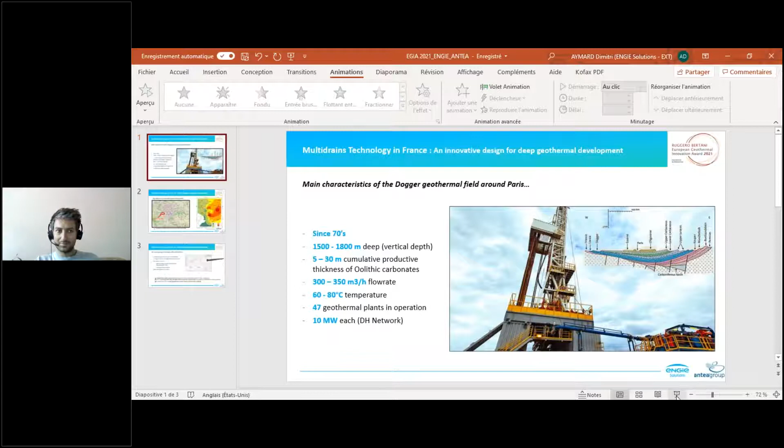Hey everyone, so Consuelo, can you give me control to present the slides? Great, I hope you can see my screen now.

So it's our pleasure to be here today. I'm Dimitri Aymard, representing ENGIE Solutions, and I will talk about our innovation that we worked on last year with Nicolas Fréchin, representing Antea. We are talking about the multi-drains technology in France, an innovative design for deep geothermal development.

Going back to the beginning, we are in the Paris Basin. On the right, we have a cross section showing this basin with different geological layers interesting for geothermal. The light blue one is the Dogger Reservoir, a geothermal field well known in Paris, used since the 1970s. Its main properties: around 1,600 meters depth, with high flow rates between 300 and 350 cubic meters per hour, and temperatures ranging between 60 and 80 degrees. In this basin we have nearly 50 geothermal plants in operation, each producing nearly 10 megawatts, used for district heating.

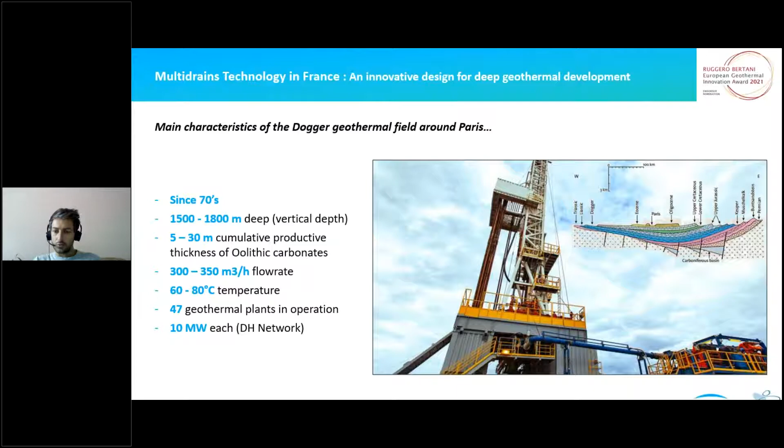One thing to understand with this reservoir is the heterogeneity of its properties. Looking at the transmissivity map on the right, different colors highlight different transmissivity values. You can see that the east side of Paris has better properties than the west side of Paris. It's the same for temperature as well.

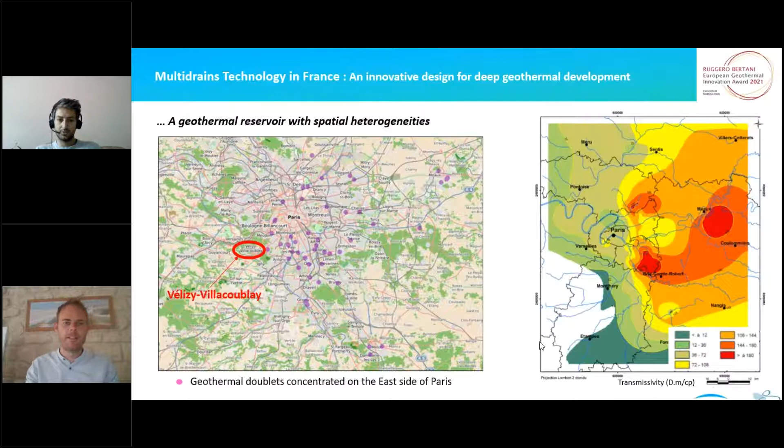I will now let Nicolas present our innovation in detail in the next slide. Good morning. So how did we go about increasing the productivity of the wells in such a geological context, as Dimitri presented?

So what is the result of this original architecture? To give you an idea, we tested the well after drilling only 1 leg in the reservoir, then tested it again after completing the full drilling and acidizing program. We found that the productivity index was multiplied by 5.5 between the 2 test phases. Hence, this technology opens up new perspectives around Paris, but also more generally wherever the targeted geothermal reservoir offers poor properties.

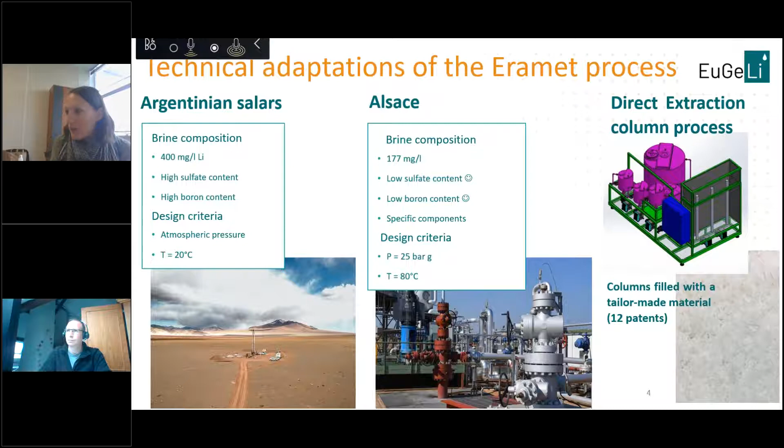This material is filled in columns to process this extraction in continuous mode. Why we applied to this geothermal award today with Électricité de Strasbourg is because we did a first pilot campaign, lasting 3 months between December 2020 and February 2021. We extracted lithium under CO2 pressure at high temperature, with no modification of the brine.

We achieved a very high yield, up to 90% lithium recovery. This is why we are very proud to apply to this innovation award today.

To our knowledge, this is a first in this domain. Lithium can be easily extracted at atmospheric pressure, but under pressure, using this type of technology, this is a first. And this is a first step for us, because we are right now preparing the second pilot campaign of the EuGeLi project in order to have what we call the industrially scalable pilot test. So we will have all the engineering data to be able to design and plan the performance of the future lithium geothermal plant. Thank you for your attention.

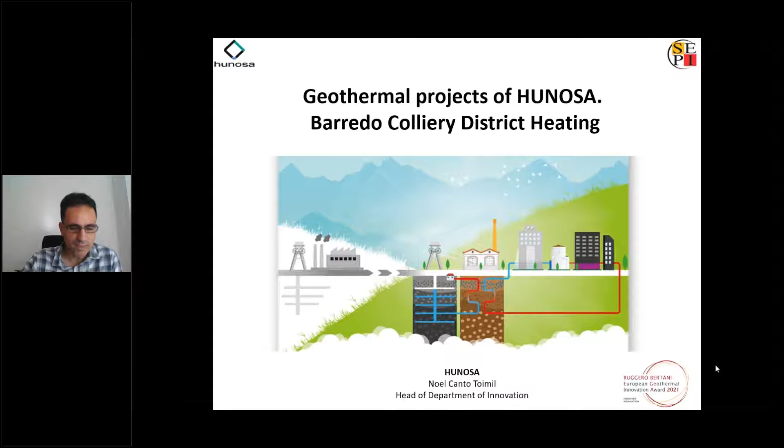Good morning, everybody. My speech addresses the geothermal project Barredo Colliery district heating, one of the geothermal projects that we have developed using mine water, and the one that has been nominated for this award. Before going into detail, I would like to give you a brief outline of our company. HUNOSA is a coal mining company located in Asturias, in the north of Spain.

From the beginning, HUNOSA has been focused on coal extraction as well as electricity production. Nowadays, after a long process of reduction in the number of mines and employment, HUNOSA is trying to diversify into different things, such as renewable energy, especially geothermal projects using mine water.

We started with geothermal projects because we wanted to look for a use for those mines that were not in operation and were flooded. When a mine is closed and flooded, we still need to pump water to keep the water table from damaging buildings or infrastructure, which creates everlasting costs for us. Geothermal projects are a source of income that helps offset pumping expenses. At the same time, we harness a resource, the mine water, that was previously considered a waste product. We also provide new life for mining facilities, collaborate to develop renewable energies, and create new jobs.

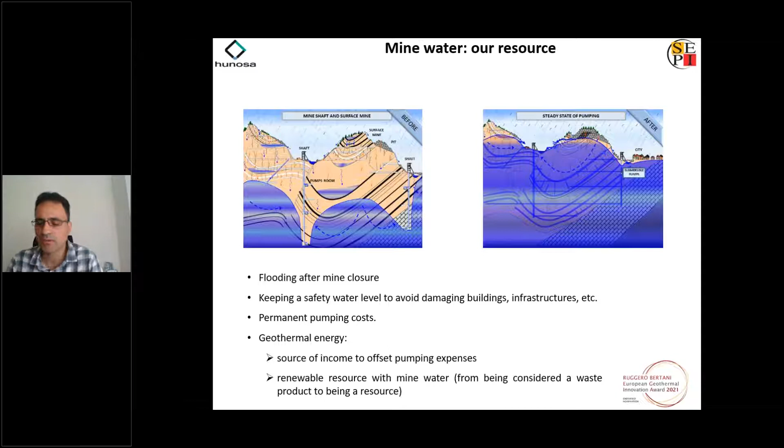The first geothermal projects started operation in 2014, harnessing the heat of mine water, which has a temperature of 23 degrees. This mine water is pumped from Barredo Colliery, a mine located in a town in the central mining area of Asturias. Later, we decided to make the most of the mine water pumped from Barredo Colliery and extend the geothermal facilities. This time we carried out a district heating system, Barredo district heating, which has been in operation since last year. With the same philosophy, we are now finishing construction of a new one, Fondón district heating, linked to another mine not far from Barredo Colliery.

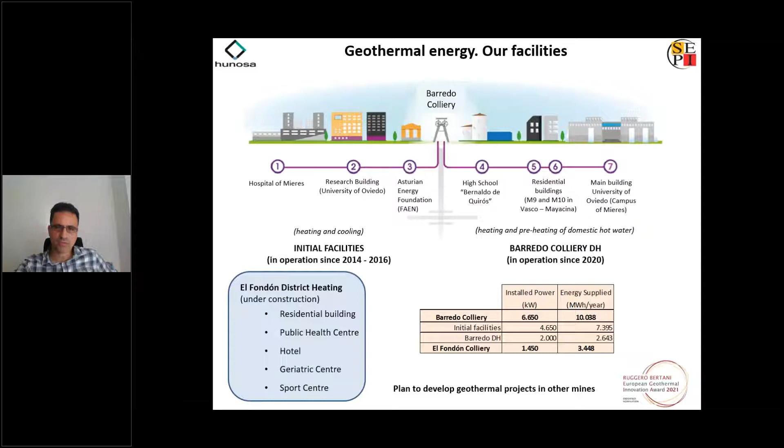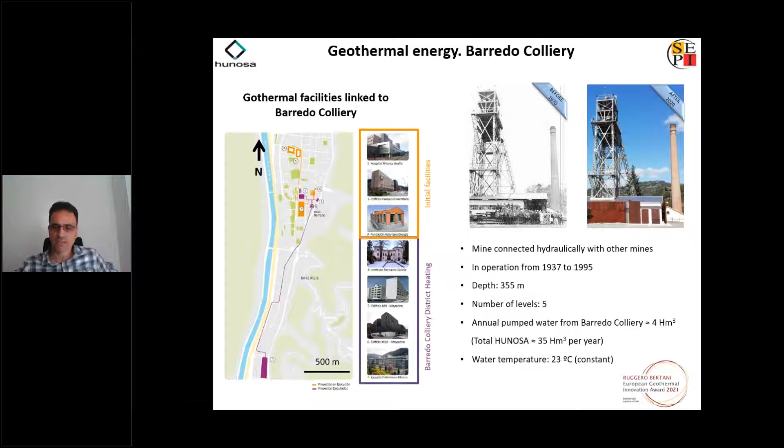The table shows the installed power and the energy supplied annually in each group of facilities. In this picture, you can see the spatial distribution of the first geothermal facilities and the Barredo district heating, as well as the characteristics of the mine. Barredo district heating provides heating and preheating of domestic hot water to a secondary school, the main building of the University of Oviedo in Mieres, and two residential buildings. In total, we provide around 2.6 gigawatt-hours per year, with a reduction of CO2 emissions close to 700 tons per year.

It's worth mentioning that the electricity the district heating uses comes from a renewable source — it's 100% renewable. In terms of the cost of energy, we give more than 10% savings to our clients.

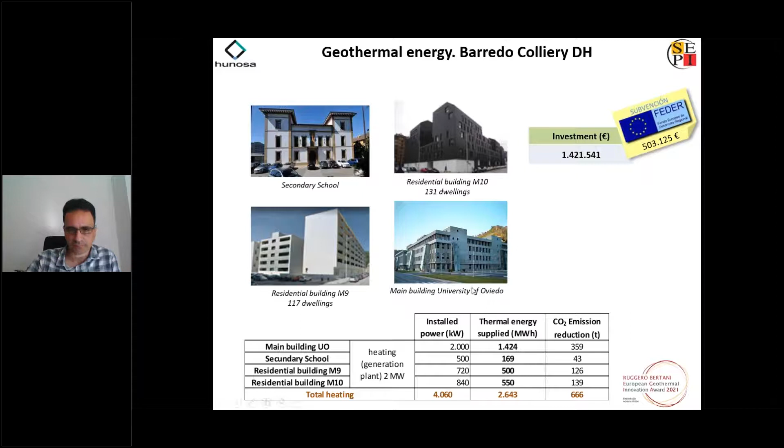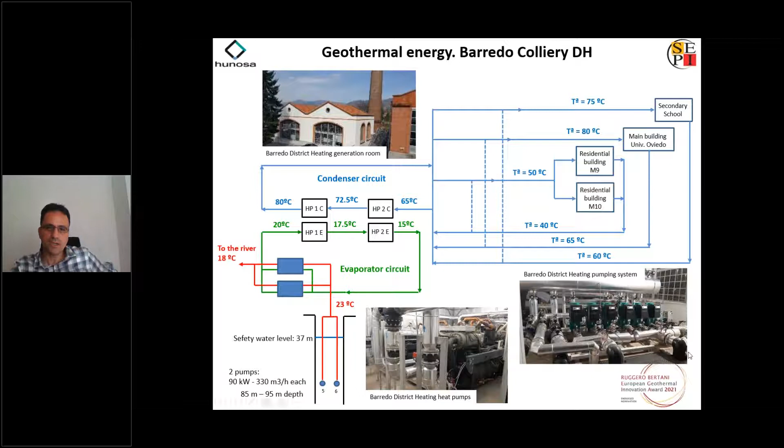So just to finish my presentation, I would like to mention that Barredo Colliery district heating was awarded by the International Energy Agency in 2019 in the category of emerging markets, as well as it was selected for a report by the European Commission in relation to district heating systems. And I hope that I can say in the next presentation that it was also awarded with the Ruggero Bertani European Geothermal Innovation Award. So that's all. Thank you very much for your attention, and good luck to everybody.

Thank you very much, Noel, for your presentation, and a really good project indeed. Thank you. And let's see who will win this award this year.

Now we will fly to Sweden, and I will give the floor to Hilary from Megawatt Solutions to show a new solution in heat pumps, the new integrated heat pump solution. Hilary, the floor is yours.

Good morning. We had some muting issues. It's a great honor for us to be here today presenting our geothermal technology to our distinguished jury members and esteemed colleagues from other European countries. Megawatt Solutions Nordic AB, hereinafter referred to as Megawatt Solutions, is a leading Swedish geoenergy technology company that was founded in 2016. Our geoenergy district heating solutions have been installed in our customer sites and in full operation since 2019.

Mission critical reliability. Our e-box has an uptime of 99.6%. This ensures stable district heating operation, and we achieve this by our unique Lego-style modular design. Each e-box contains 4 to 8 of our own tailor-designed heat pumps. Multiple e-boxes can be connected together to form a large energy station used as a district heating cluster. Such installation can be extended based on further development in the area.

Megawatt capacity. Our large capacity provides district heating by using geoenergy solutions instead of traditional combustion-based heating solutions. The Lego-style modular design offers scalability of the system. More modules can easily be added later based on customers' increased energy needs. Such design also provides flexibility, as individual parts can be quickly added or replaced. This is extremely important for the maintenance and service of the energy system. For example, a compressor can be replaced in a matter of hours without shutting down the system. So we provide a stable, consistently reliable energy system without interruption.

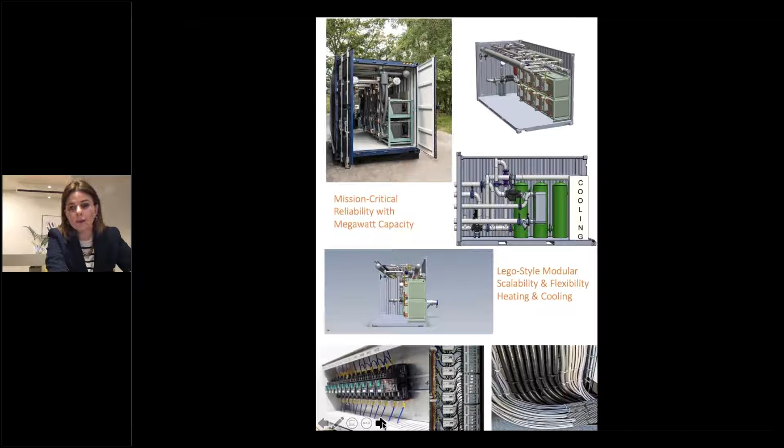Rationalization. We have rationalized the traditional manual labor process and found ways to drastically reduce the installation time. A traditional process could take up to 18 months, and it's now done in a few weeks. Industrialization. Like the housing industry, most of our installations are pre-manufactured in a Swedish factory, where they're also tested and quality assured. This ensures our plug-and-play feature for high-quality, fast, hazard-free, environmental-friendly project implementation. We provide cooling in the summer and heating in the winter.

Digitalization. We connect all the sensors from our e-box energy systems, customers' IoT devices, and their BMS into a cloud-based SCADA system. Our open API facilitates easy connectivity to customers' existing IT systems and BMS. Real-time data is sent to authorized engineers and property managers from anywhere at any time. This allows top leaders, property managers, and engineers to make data-driven decisions on preventative management instead of reactive management, improving property financial performance, the energy production, and smart building control to avoid wasteful habitual behaviors.

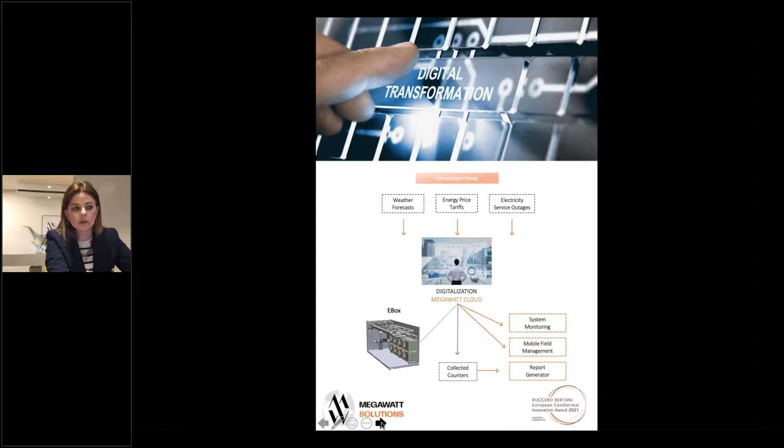Outdoor e-box. During the COVID-19 pandemic, under tough public health restrictions, our outdoor design has proven to be hugely beneficial by allowing our engineers to have free access to the energy stations, and has thus ensured continuous service in our customers' properties. Another benefit of the outdoor design is that it frees up space within the building itself, and the e-box could even be used as a charging station for electric vehicles.

So, the carbon-free hybrid GSHP PVT e-box solution. As part of our ongoing R&D with KTH, we have launched a new generation of e-box solutions by combining GSHP with PVT. The new solar hybrid e-box is a completely carbon-free energy solution.

It reduces borehole depth or decreases borehole space while keeping a similar or higher performance level. It adds increased COP due to the thermal gains from the PVT. The e-box electricity consumption is covered partially or fully by the PV generated electricity, and it increases the efficiency of the PV panels due to the cooling of the heat transfer fluid circulation system.

A standardized solution for decarbonisation. The e-box presents a unique opportunity to hasten the path towards decarbonisation. The prefabricated e-box is ready to be shipped on demand all over the world, hence the standard 20-foot design in a container.

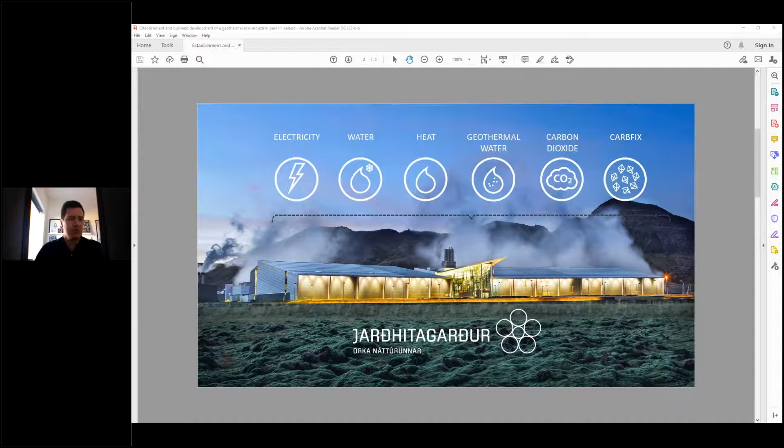Let's take a better look at the two ongoing projects that highlight the innovation taking place at the park today.

Climeworks is our newest customer in the geothermal park. The company is a global leader in capturing carbon dioxide directly from the air. Climeworks uses waste heat in the geothermal water from Hellisheiði power plant during low demand for district heat. The company also uses cold fresh water and electricity from ON Power, and our sister company CarbFix offers them permanent storage of carbon dioxide by turning it into stone in the basaltic bedrock surrounding the geothermal park.

Successful and innovative cooperation and synergy of companies can truly make a difference in tackling global challenges such as sustainability, resource efficiency, and the climate crisis.

The second project, ON Power, is also taking part in a European Union supported project called Hydrogen Mobility Europe, alongside the oil company Skeljungur. In 2020, ON Power started producing green hydrogen via electrolysis of water in a geothermal park by using electricity from Hellisheiði power plant.

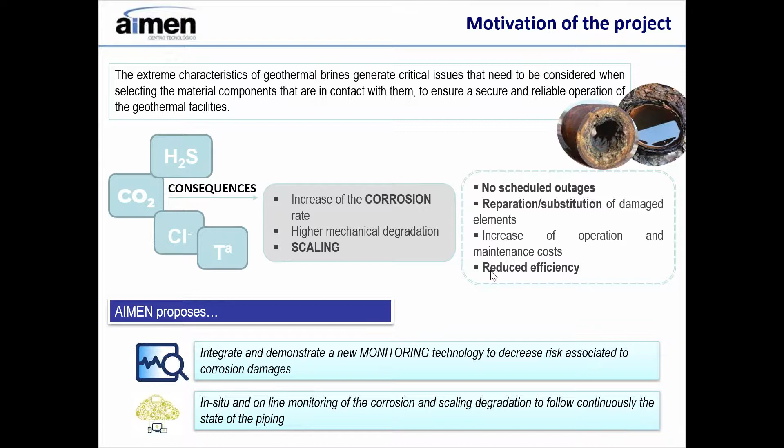Sorry, but for this purpose,

AIMEN designed, manufactured, tested, installed, and validated a corrosion monitoring system in the frame of a European project called Matching, that finished 2 years ago.

The corrosion monitoring system has this conceptual design. It is composed of different sections of the same material as the piping, or alternative materials like coatings or other metals that you can compare in operational conditions in order to study their corrosion performance.

This design is adapted to the requirements, materials, and dimensions of the piping system of the geothermal plant, and can be easily connected by conventional flange to the rest of the installation.

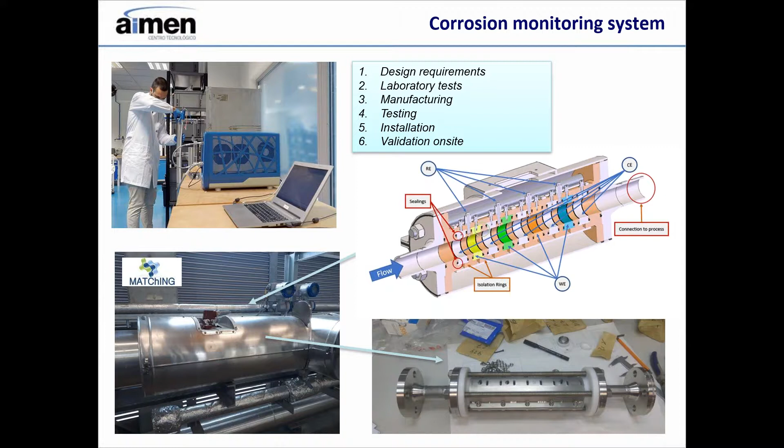Of course, this type of system is not only this monitorized section. There are additional elements in order to register and collect the data obtained from these monitorized pipes.

The main technique to follow the corrosion behavior of these materials is electrochemical impedance spectroscopy. So we need equipment to register this type of measurement, and this is a potentiostat that will be connected to this probe.

Moreover, we need a PC and a control software that AIMEN developed. We obtain by internet the results from the corrosion behavior of this material remotely.

From these graphs, we obtain by numerical analysis an important parameter, the polarization resistance, which is inversely proportional to the corrosion rate of the material.

By analyzing and interpreting this data, we can estimate the corrosion behavior of the materials exposed in this monitorized section of the piping system. AIMEN can, in this way, notify and alert the geothermal plant if there is any risk of failure due to corrosion or scaling, and we can prevent serious damage in the installation over time.

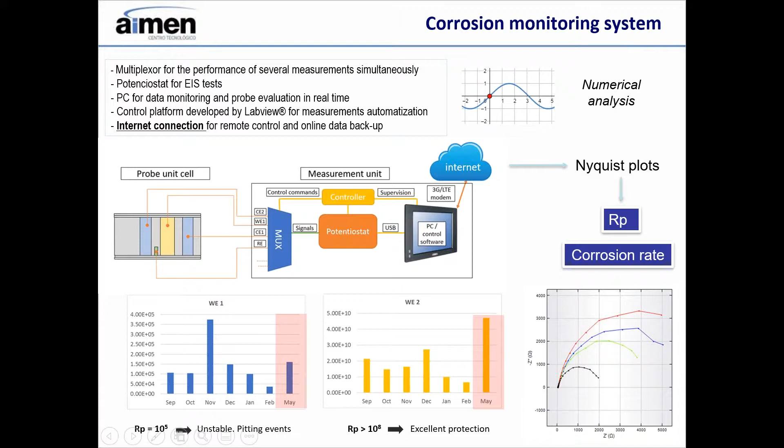Finally, I'd like to highlight the different characteristics or advantages of the system based on these 6 pillars: field of application, reliability, originality, innovation, reduction of emissions, and improvements in energy output.

As you know, corrosion and scaling are phenomena that can occur not only in geothermal plants, but also in other plants exposed to these conditions. So this corrosion system can be applied in other fields, in other sectors like petrochemical or chemical industry.

In terms of originality, corrosion and scaling in wells or pipes are difficult to detect visually or to monitor continuously. So this innovative system will use non-standard methods for in situ or online monitoring of corrosion.

In terms of reliability, AIMEN's probe can capture even tiny changes and it indicates corrosion of the actual pipe in near real time.

Regarding innovation, the high sensitivity of the impedance spectroscopy allows us to identify change, corrosion, or defects in the material long before any visible damage occurs, so we can prevent future damages in the plant.

And finally, the use of this monitoring system can prevent serious failure in the installation by selecting the best materials performing for its operating conditions, and promotes in this way an increase of energy efficiency and, in consequence, reduction of CO2 emissions. And this is all from AIMEN's side.

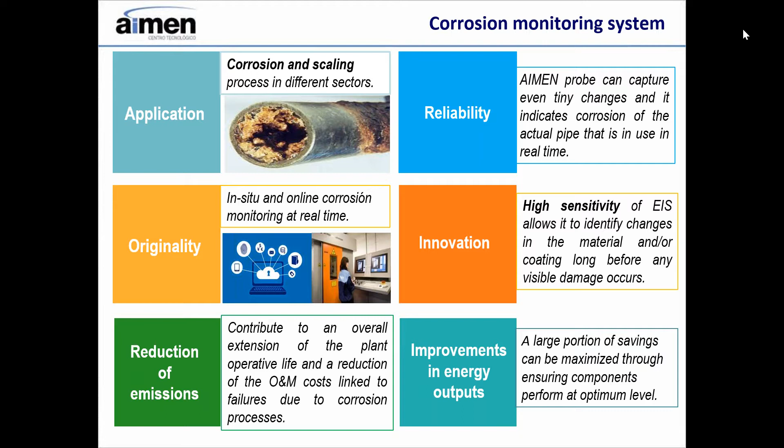Thank you again for the opportunity, and sorry for the bad connection with the problems with internet.

Sorry. No problem, Lorena, it was just in time before we closed the event. So you are just perfect, in the limit, just in the limit. It's really interesting to hear also from you because it's quite an interesting innovation for geothermal, and we know the issue we have with corrosion.